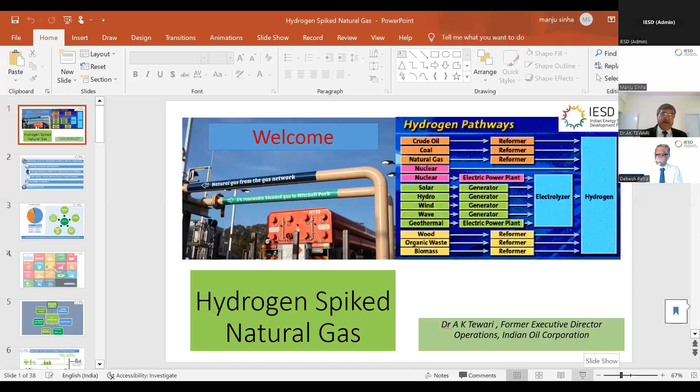Respected ladies and gentlemen, I welcome you all to the present topic of hydrogen spiked natural gas. Dr. Patra has already deliberated about the importance of hydrogen and why we are going for hydrogen at all. Kindly bring it to the presentation mode.

So first, we talk of hydrogen because in the country, the formal announcement about hydrogen was made last year during the Independence Day of 2021. The PM announced it, but the work actually started much earlier than that. Hydrogen is not a new thing in the industry; its invention was done more than 200 years ago.

As far as the oil and gas industry is concerned, hydrogen has been used for the last few decades, basically in refineries for fuel upgradation, fuel quality, and impurity removal like sulfur dioxide and sulfur removal, as well as fuel upgradation from higher end to lower end. Additionally, you all know that ammonia production is definitely centered around hydrogen. So hydrogen was definitely used in the industry.

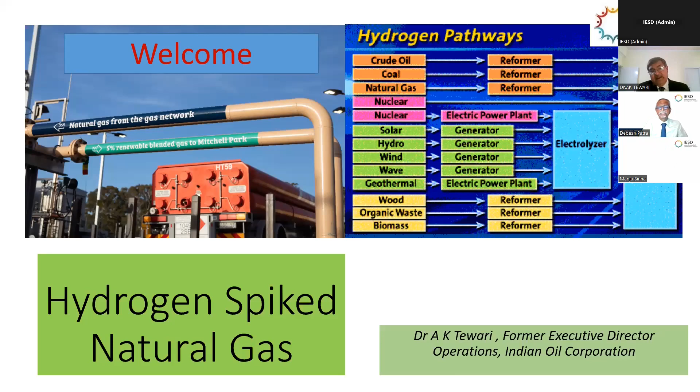Later on, when environmental challenges started coming to the world, a thought process began on how we can decarbonize the sector and use hydrogen, which is available in abundance in the form of water and its derivatives. There are certain processes where we can possibly include and maximize the use of hydrogen. Once you produce any energy or energy carrier, you definitely need to transport it.

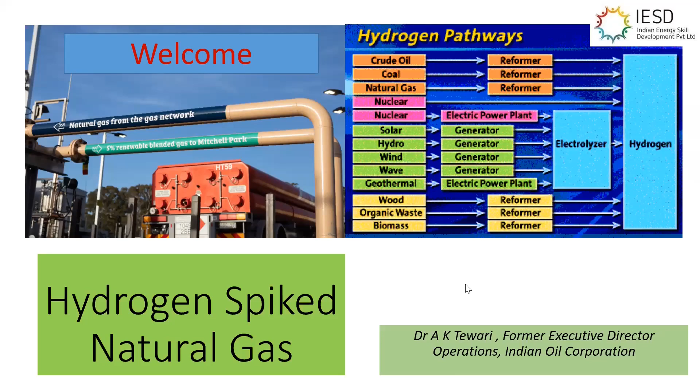Dr. Patra has discussed the conventional mode of transportation. In addition to that, what could be the innovative mode of transportation? Because ultimately, once you produce anything, it has to go to the end consumer through a system. Next slide, please.

In this brief interactive talk, we will be talking primarily about the Indian energy sector—our decarbonization challenges and the role of natural gas in that. Then we'll talk about the hydrogen ecosystem and its perspective in the Indian system as well as worldwide. Then hydrogen blending in natural gas: why we want to go for blending at all, and what are the opportunities and challenges associated with that.

I'll be focusing on the engineering challenges. Then we'll look at pilot projects, study observations, and whether any codes and standards have been developed or are in the developing stage. And then we'll talk about the advantages and limitations.

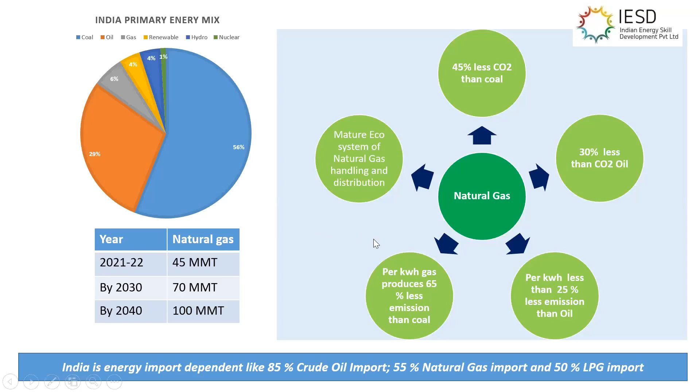The system is mature—some of my senior colleagues like Dr. Patra and other industry veterans are also connected and will recall that we completed the first HBJ, Hazira-Bijaipur-Jagdishpur natural gas pipeline somewhere in 1988. So nearly 35 years have passed, and the system has become fairly mature in natural gas handling and distribution in the country. Next slide, please.

India is aiming at decarbonization. Coming straight to the topic, we have taken up decarbonization as an attempt because it also helps with import substitution, provided you are able to produce domestically.

One initiative is Satat, under which we are creating biofuel as a sustainable alternative for development of alternate transport fuel. Another is high focus on renewable energy, because we want to produce hydrogen using renewable energy as green hydrogen.

On energy efficiency, our existing system efficiency is poor and we have to eliminate losses and increase efficiency. For a diesel engine conventionally, we get about 40% thermal efficiency. If we can improve that, utilization per unit of fuel will definitely be higher.

Similarly, I talked about the increasing share of gas. We plan to go from 6% to 15%.

On electrification, we are going for EVs and charging stations, and the country has seen expansion in that area. This started about 1.5 years back with the first electric charging station among retail outlets of petroleum products.

Today the country has close to 5,000 charging stations in retail outlets, which definitely indicates the pace of that growth.

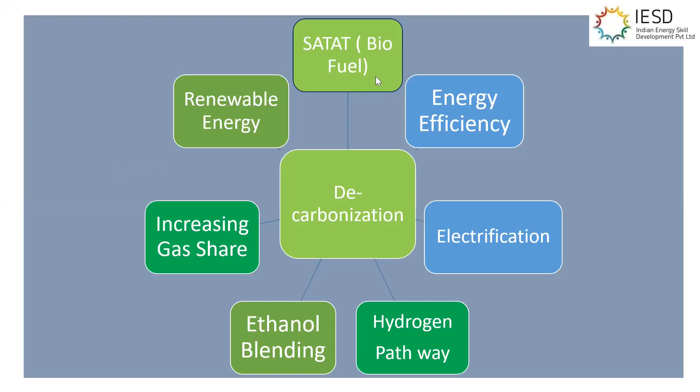Now coming to the hydrogen supply chain. Traditionally, hydrogen has been generated for production of ammonia, cleaning, or upgrading fuel using either natural gas or naphtha.

Normally, if you are not capturing the carbon dioxide associated with that, it's gray hydrogen, and this was within the use of industry.

Dr. Patra has very well described that if you have to consume the energy generated locally, you possibly don't require a much larger transmission system. So refineries were producing hydrogen and consuming it within their hydrodesulfurization systems and other processes, so there wasn't much transportation involved.

Similarly, in the case of ammonia, the fertilizer industry was locally developing hydrogen for production, and now the country has already started gearing up for the use of hydrogen.

Throughout the distribution system of the natural gas pipeline network, be it the transmission pipeline system, sub-transmission pipeline system, or distribution system.

Natural gas is transported from the location where we are producing it; we produce about 45% of it domestically. From that location, we carry out certain cleaning and modification, and then transport it to the pipeline system, or we import from LNG terminals and transport it.

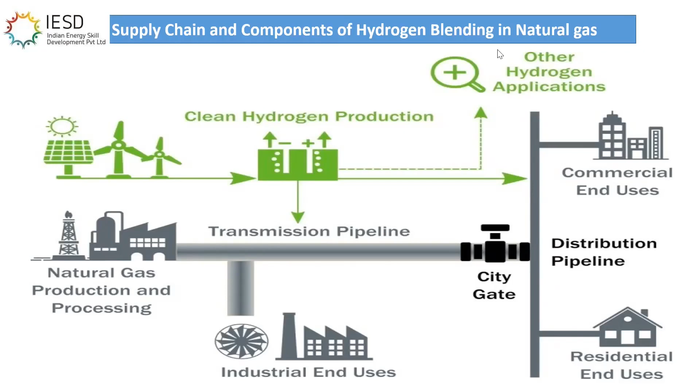The aspects covered include production of green hydrogen, meaning hydrogen produced using wind, solar, or maybe hydropower, with more focus on wind and solar, or biomass and bio waste. These also contribute, but the quantum is definitely less.

Gray and blue hydrogen are produced using natural gas, oil such as naphtha, and also coal, through coal gasification systems, which are also taking place in the country in parallel.

The process of green hydrogen requires electrolysis, that is, splitting water into hydrogen and oxygen. The oxygen can be utilized for medical purposes, stored separately, or sent to the atmosphere.

For gray and blue hydrogen, a very common route is the steam reforming route, where the reaction of methane with steam at high temperature is carried out and a syngas is formed, and that syngas is later converted for the production of hydrogen.

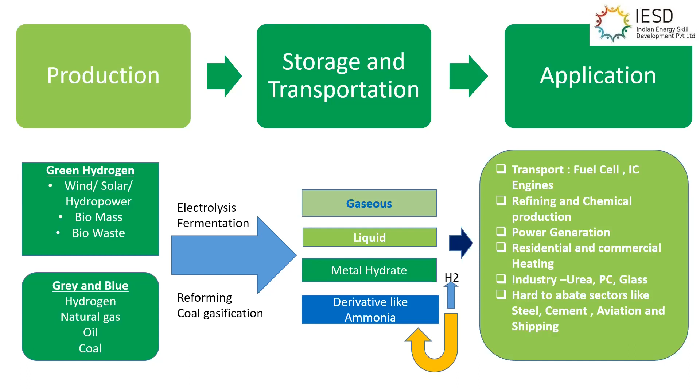And of course, urea production, petrochemical production, glass production. Countries the world over are targeting hard-to-abate sectors like steel, cement, aviation, and shipping, which produce a lot of carbon dioxide emission, to see whether this can be progressively and systematically converted to hydrogen. Because among the entire fuel cycle, all products when burning or combustion takes place produce carbon dioxide - it is only hydrogen which produces water vapor.

Coming to the transportation side, you can have pressurized road tankers in liquid form or gas form to transport them. Definitely the pressure is very high compared to the normal pressure of transporting nitrogen, and hydrogen in pressurized cylinders. You can have a liquid form also for transportation.

Recently, about a year back, a transportation from Australia to Japan has taken place - a tanker of liquid hydrogen. So it's not uncommon; progressively it will become more common.

Storage can be above ground and underground. For large scale storage, some of the thinking is going on cavern storage too - there is salt and rock cavern in addition to aquifers.

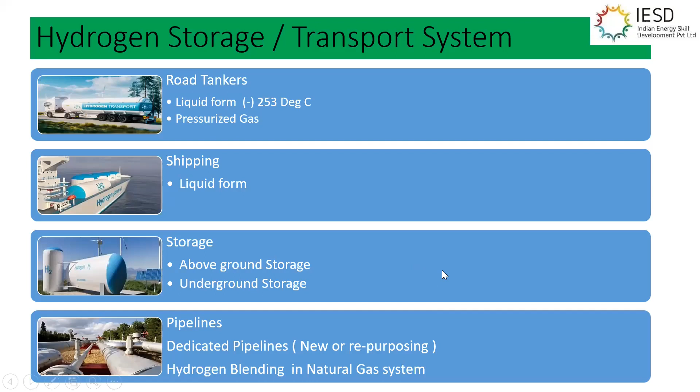Pipelines - dedicated pipelines can be there, as Dr. Patra was telling, or hydrogen blending in the natural gas pipeline. Dedicated pipelines require you to create an entire infrastructure of your own - it will be time consuming, investment will be high. And if you are blending partly, you get a state where you already have a big built infrastructure - that is the advantage to you.

Natural gas consists of methane, ethane, propane, and many other things, but the maximum 90% plus component is methane, which is colorless, odorless, non-corrosive, and tasteless. H2S, nitrogen, and other impurities are present in much lesser amounts. If you talk of LNG gas, practically you are having zero sulfur component. For domestic produced gas, we try to remove sulfur and mercury beforehand, so it becomes, emission wise, less of a problem compared to other liquid fuels.

Hydrogen, as you already know, is colorless, non-toxic, lighter than natural gas, and much lighter than air. Its flammability range is much higher, 5 to 75% or so. Common blends become highly flammable, which we have to handle, especially compared to natural gas. Laminar combustion velocity is high, ignition energy is low, and it may produce higher combustion temperature.

So these are the components that, engineering wise, we are supposed to be handling. That's why the percentage is limited depending on where we are going to use it and what the end application is going to be. Next slide, ma'am.

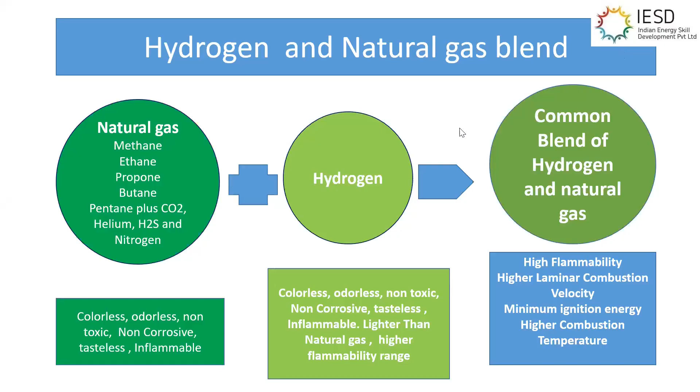Engineering challenges: hydrogen blending density is lower than methane, so for any leakage from the same leak size, the volume flow will be high because it is lighter. Viscosity reduces with hydrogen blending non-linearly as the hydrogen concentration increases. So we are talking of 5 to 15 or 20%, which is manageable within that range.

Molecular mass reduction affects side branch flow and buoyancy forces, because hydrogen is lighter. Once injected, there is a chance of stratification in the pipeline, with a tendency to get trapped at the upper layer. That's why it is normally injected from the lower side at a certain angle, so that, as per the dispersion model, stratification is avoided.

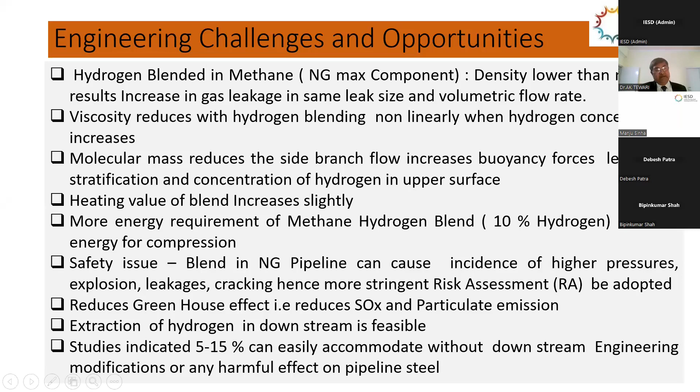Heating value of the blend increases, requiring more energy for compression. In CNG applications, you go for a vehicle filling pressure of around 250 bar. So definitely a little more energy is required, because compressing a lighter gas requires more energy.

There are certain safety issues because of higher temperature, higher explosion risk, and the lighter nature of hydrogen, so risk assessment has to be geared up accordingly. India already has a safety structure well lined up as per regulatory requirements, ERDMPs, and other such things, so we can address whatever changes are required for the proper introduction of hydrogen.

Regarding the greenhouse effect, it reduces SOx level and particulate matter, and definitely increases NOx level, but only beyond a certain level, not up to 30-40%. Below that, the NOx level has no significant effect.

Extraction of hydrogen downstream, if you want to separate it, since gravity and density are different, you can use a membrane system to separate it. If you want it for end use, for a specific application like a hydrogen turbine, possibly you can separate it too. Industry studies have indicated that 5 to 15% can easily be accommodated.

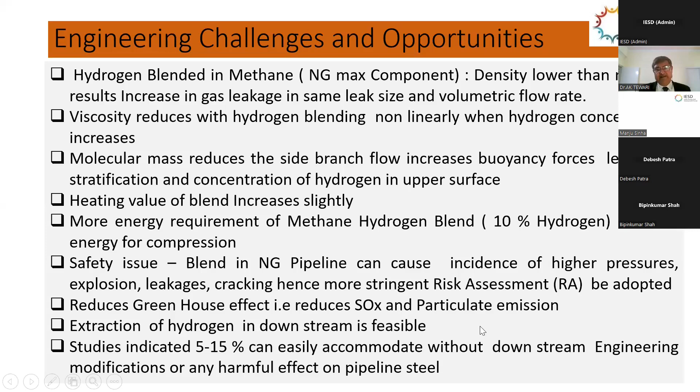Next slide, ma'am. For the steel pipeline, I'll touch on other aspects too. The most prominent problem we see is pipe material degradation, that is embrittlement affecting the high tensile steels. It reduces ductility and affects mechanical properties. I'll discuss this a bit more in the next slides.

Switching engine burners from methane to a hydrogen-methane mix may require minor modifications to the burner. Definitely in SI engines, as such, no modification is required, because a lot of testing has already been completed, both by Indian Oil and elsewhere in the world, and it is okay.

It's suitable for large gas turbines because the higher temperature and larger enthalpy drop will produce higher output. In the process, burning hydrogen also gives higher temperature for steam, and you get higher burner efficiency up to 25%. Beyond 25%, some flashback and other issues take place, so that is not done right now.

Embrittlement leads to crack formation in the pipeline, which is a major challenge for any pipeline operator. A simulation study based on cyclic loading was carried out in the lab for a pipeline of X42 grade, because higher grade pipelines are more susceptible to cracking. It was done assuming less than 40% crack already existed in the pipeline, to see what the hydrogen environment effect would be. The simulation and fatigue testing analysis indicated that even after 100 years, the crack will not propagate beyond 75% of depth, starting from 40%.

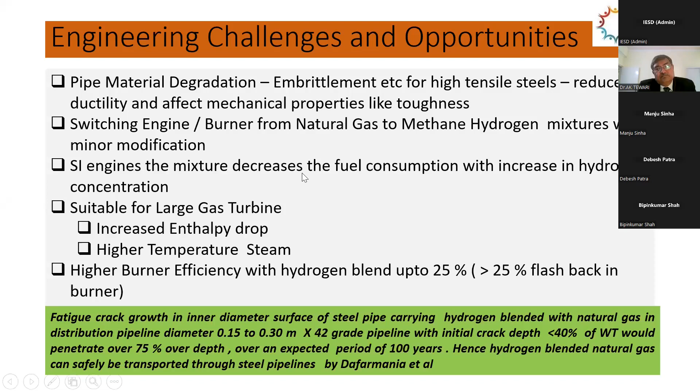The quench distance of hydrogen is smaller, so heat loss to the chamber wall would be slightly increased by adding hydrogen into the natural gas. Energy density is almost 9 times lower, so blending reduces the effective energy per unit volume, which possibly requires higher compression too.

One advantage, in case of a subsea pipeline—we are talking of the natural gas city distribution pipeline, but for subsea pipelines—natural gas hydrogen blending can avoid hydrate formation. Hydrate formation in any natural gas pipeline is a major risk, so this reduces that risk.

The laminar burning speed of hydrogen is nearly 8 times higher than that of natural gas. So addition of hydrogen can increase the burning velocity, bringing advantages of shorter combustion duration and constant volume combustion duration, giving improved thermal efficiency of the engine.

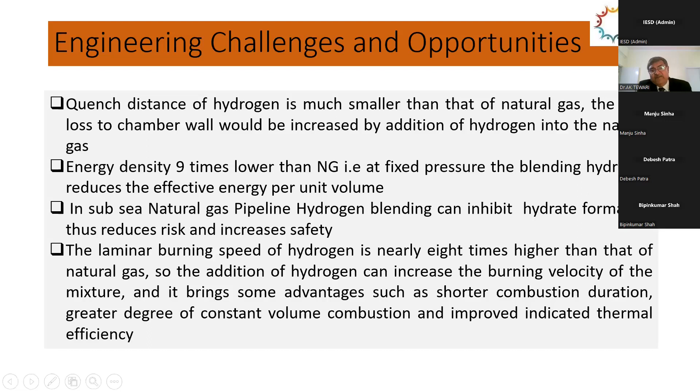So accordingly, the controls are exercised in the pipeline.

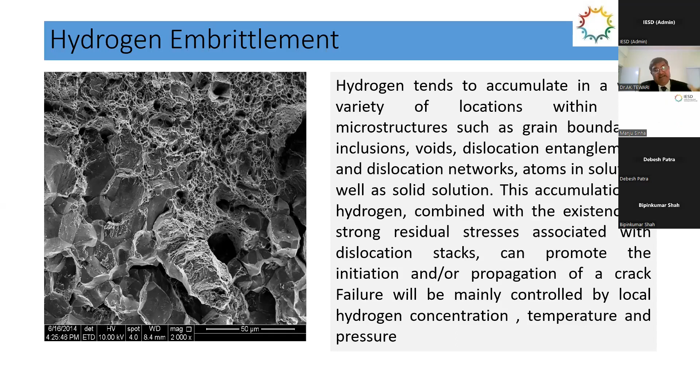Next slide, ma'am. So to conclude on the embrittlement aspect: strength of material and residual stress matter, because forming or welding creates certain stresses in the metal. It depends on the strength of material, such as yield stress or ultimate tensile strength, but also on the residual stress in the system, pressure, temperature and exposure time, strain rate, surface condition of the metal—whether smooth or irregular—and the concentration or amount of hydrogen exposure.

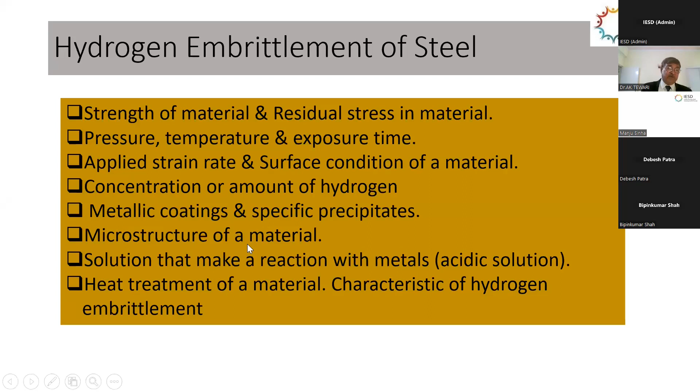Certain metal coatings prohibit hydrogen from entering the metal, and the microstructure of the material—whether ferrite, bainite or another structure—affects how hydrogen penetration increases or decreases. Certain solutions react with the metals, like acidic solutions, which I prefer to avoid. Heat treatment of material matters too; the characteristic of nitrogen, particularly nitriding, improves the embrittlement properties—there won't be more embrittlement if you use nitriding as a heat treatment process.

So we summarize the problems here: material toughness, ductility, elastomer effect—because we are distributing through a pipeline system that has PE pipe too—leakage, permeation, effect on the pipes and meters, and of course end-use burners and other effects to consider.

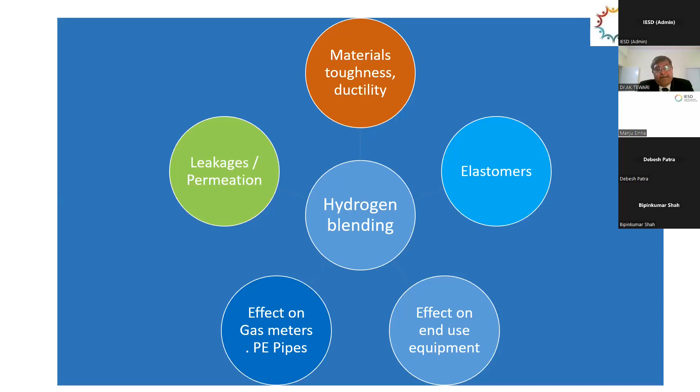One of these studies, of course many other studies will be presenting also, but that's one major study - the Gas Technology Institute of the USA. They have carried out the life cycle assessment of hydrogen blending, and the industry is normally guided by their observation. They said that safety is acceptable up to 15% blend.

Leakage assessment is likely to increase. So definitely you should be prepared for a better leakage management system, better sensors to find out the leakage if it is happening. The pipeline industry and others are already aware of this.

They also indicated one very vital point, that lower grade API pipe used for steel pipe in the industry for transportation - up to X42, X46, and even X52 - is suitable. Sometimes we have X70, we have gone for that, but higher grades like X80, X100, even X70 to the extent possible should be avoided.

They concluded up to 50% blend in this lower grade - lower grade meaning low tensile strength steel. The 50% even may not cause much failure, and there will be no appreciable, almost no effect on the PE line also and the gas metering. That the Premier Institute gives such findings gives a little confidence among the engineering fraternity.

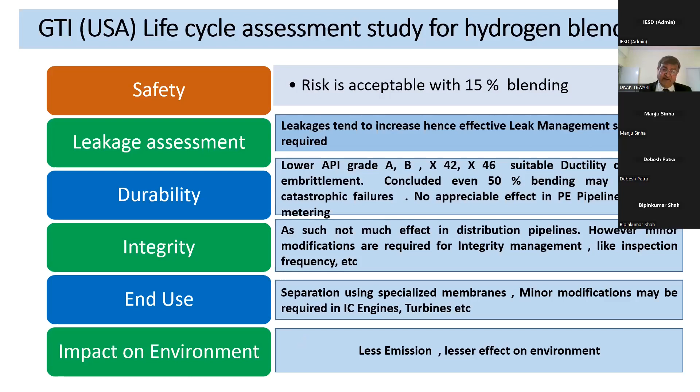Regarding the PE pipe, because of low pressure distribution, we go for a combination of steel pipe as well as polyethylene pipe. The study also indicated that as such there is no effect - they have taken a study for 1,000 hours or so for various pressures, by various institutes, and as such no problem was found. They indicated that safe and efficient distribution of natural gas can be done along with the hydrogen mix, with the PE pipeline system too, which is operating at lower pressure.

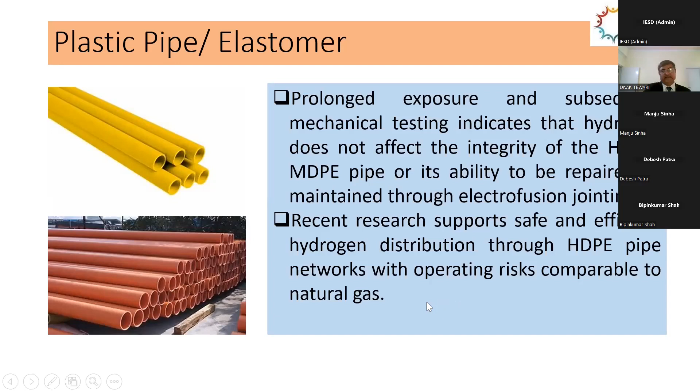For example, in your houses, it is coming in millibars - some millibars only you are getting. And for a distribution industry or something like that, they are getting around 4 to 5 bar, whatever is required. And particularly for CNG, you are getting it at low pressure, then you have a compressor which compresses it to 250 or 300 bar and puts it into the vehicle. So normally the distribution system is at lower pressure, where these pipelines are also suitable in addition to the steel pipeline.

Research findings on hydrogen blending in natural gas were carried out almost world over. The US indicates that 5 to 15% volume is possible, and has given clearance for their grid. Canadian research is a little more conservative - their research council laboratory undertook tests and indicates 1 to 5%. The Australian report clearly says up to 10%, no problem, and significant impact on quality, material risk, and other things they have tested - not much.

The Netherlands project says blending up to 10%, and they are further carrying out research on that. Denmark concluded 15%, and the UK concluded up to 20% hydrogen blend - absolutely no issue on that, you can go with that.

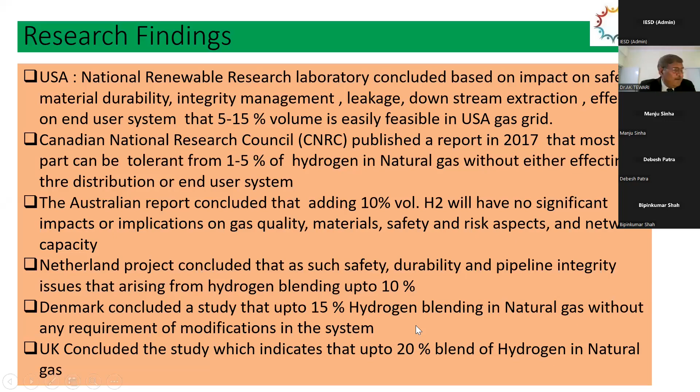Advantage, we reduce the import bill. First of all, we discussed existing capacity utilization of gas infrastructure. Most gas pipelines are designed for future use, so on day one they're not supposed to be saturating the capacity. So most gas pipelines have some cushion for future use, and that can possibly be utilized and filled using hydrogen. Even some trunk pipelines have 50% cushion that can be utilized. And the city gas distribution network is coming up too, with wide infrastructure covering 96% of the geographical area and 86% of the population. So that much volume is available for distribution setup.

Reduced emission, we talked about. India has a potential of becoming the hub for green energy. Just as after COVID we are trying to become the manufacturing hub, manufacturing aircraft and defense equipment, similarly India wants to become the green energy hub so that instead of an import dependent economy, we should be exporting green hydrogen to other places. We'll be able to meet the climate target, our SDG goal, particularly the clean energy target and climatic conditions. This is the way forward.

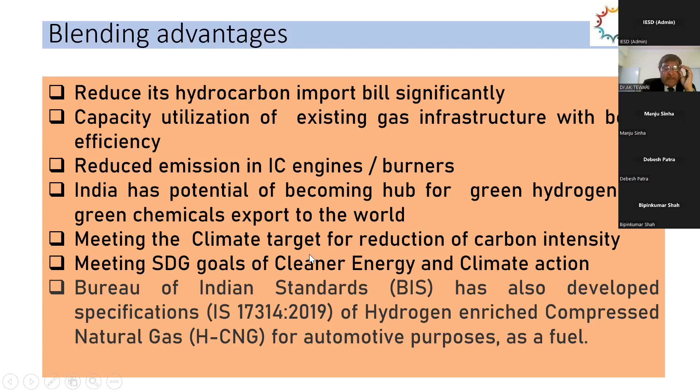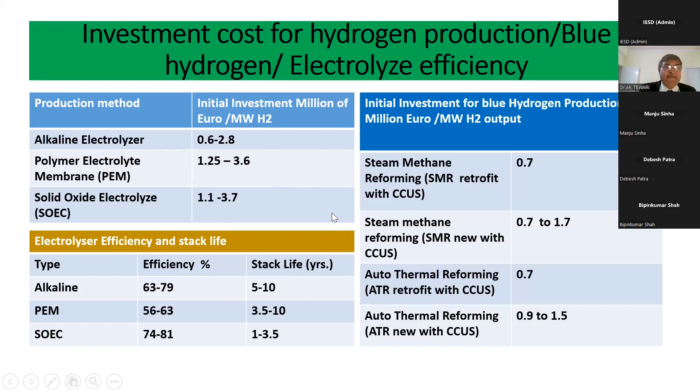India's budget has given many initiatives for green energy. Solar power allocation has gone up. Refineries have allocation for net zero emission, 35,000 crore for energy transition. Battery storage VGF for battery storage, 13 gigawatt of renewable energy from Ladakh, a remote place. And the green hydrogen mission has also been allotted close to 20,000 crore. India has been given a production target of 5 MMT of hydrogen production by 2030.

World over, as of today, we are producing 94 MMT of green hydrogen. We expect by 2030 we'll be producing 115 MMT of green hydrogen world over, out of which India itself is targeting the 5 MMT target. Allocation has also increased for refineries to go for cleaner fuel. Terminology like green fuel, green energy, green farming, green mobility, green building, and green equipment has been made for policy support of the government. And for the first time, since no petroleum product comes under GST, biogas and CBG have been brought under GST in this budget.

Coming to the Indian scenario, GAIL has already started blending in Avantika Gas Indore with 2%, and it was successful. An 18% blend was used by Indian Oil Corporation, DTC, and Delhi Pollution Board together, who carried out a trial with 50 buses running, and results are very encouraging. NTPC has started with the help of Gujarat Gas in Surat township for blending.

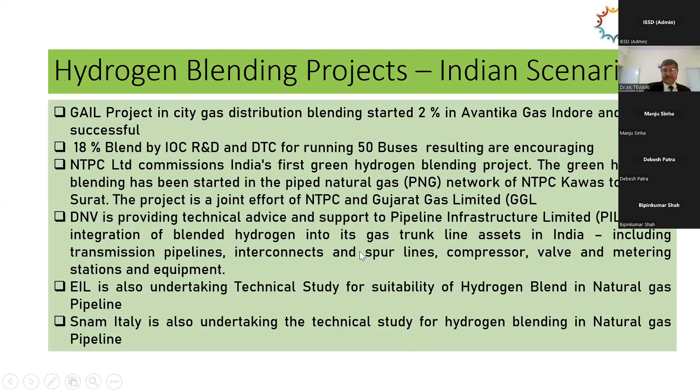DNV is taking a technical study for PIL, Pipeline Infrastructure Limited, which has a major share of the Reliance pipeline. They have already undertaken the study for the trunk pipeline, interconnecting line, and spur line, to see whether they can put hydrogen in it. EIL, being a main consultant, is undertaking a technical study for suitability for the entire industry in the petroleum sector. Snam Italy has recently been hired by Indian Oil Corporation for a technical study. So these studies and other things are already happening in India.

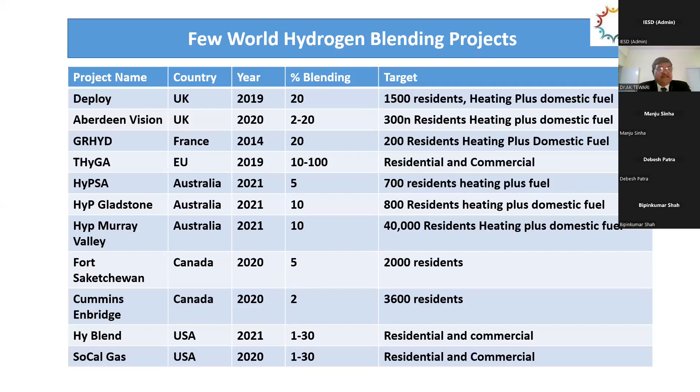As I talked about the Indian scenario, hydrogen blending has already taken place and we are comfortable in that. NTPC blending also, the initial preliminary results are giving a good indication, and technical studies are going on with IOC, GAIL, PIL. Even Oil India has called for a technical study in that. Apart from the private sector, they are also undertaking their own study in their domain for the blending of hydrogen in the natural gas system.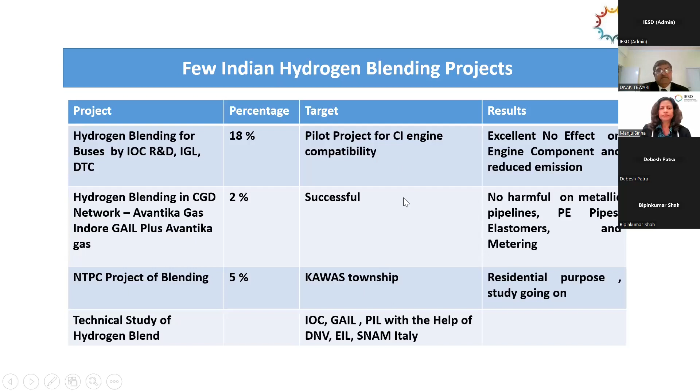Key challenges we discussed: increased combustion temperature, technical challenges, flame speed of the gas blend may require design modification in IC engines. Practically, in IC engines, up to a certain blend we have tested, it's not required. For burners, some modification will be required if you are going to 20-25%.

Lower mass flow and energy transport requires additional compression, we talked about that. Increased risk of leakage - definitely the sensors and other things, our hydrocarbon detection sensor or gas detection sensor, have to be converted into a hydrogen detection system so that we are able to identify the leakage and attack on that.

The hydrogen penetration into the lattice increases the brittleness of the pipeline. We call this the toughness of the steel. The toughness, in fact, tends to reduce. Toughness is the property which prevents crack propagation in the steel, so if that property is affected, the crack becomes faster.

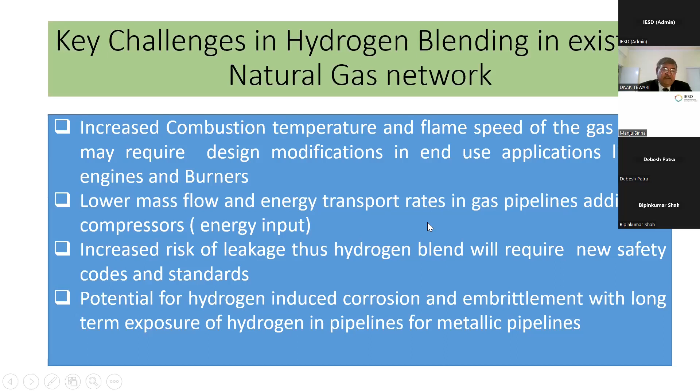Pathway India - as we discussed, 5 million pathway, over 8 lakh crore in total investment, creation of huge jobs, abatement. India is the third largest carbon dioxide emitter in the world after US and China. We emit about 2.6 gigaton per annum, a huge number.

A small sum of 50 million metric ton of annual greenhouse gas emission reduction is targeted. Large scale investment for renewable energy - as of today, the country has nearly 130 gigawatt of renewable energy, and wants to go for 500 gigawatt by 2030. Incentive has been given for green production and purchase obligation, because the electrolyzer cost is expected to come down by 70% by the end of 2030.

That is, the competition is taking place. India has also started manufacturing - the manufacturing base is set up - and the net zero commitment of carbon dioxide emission, the country is going for that, and we have to be geared for it.

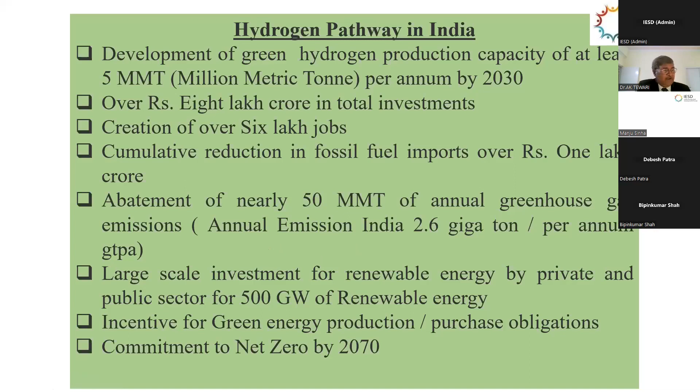So hydrogen mission pathways are very clear: demand creation, because purchase obligation and other things will come, utilization and export of green hydrogen. If we are able to produce sufficient quantity, we'll prefer to export, like medicine export, aircraft export, and defense equipment export we are targeting. Even under strategic intervention, encouraging domestic manufacturers of electrolyzer - already some companies have moved in, others are at the threshold.

Incentivizing the production of green hydrogen by production linked incentive. Support pilot projects in emerging end-use sectors and production. Identification of large scale hubs and utilization of regions for green hydrogen hubs, like we have textile hubs, petrochemical hubs or something like that - so we are targeting hydrogen hubs in the country.

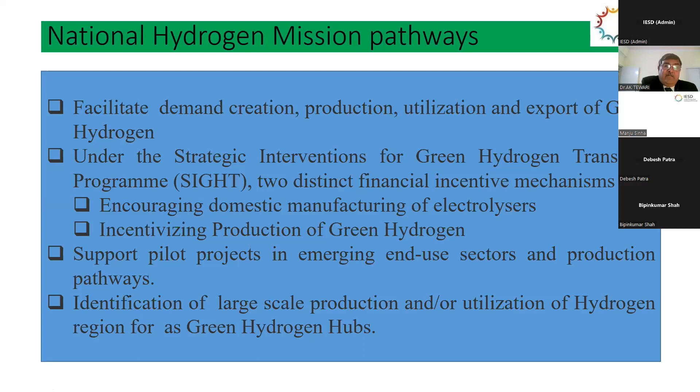Government of India has also announced that the motor vehicle act amendment has taken place for hydrogen-CNG mixing, blending, and codification has been done. It was worked out that emission reduction of CO is down by 70%, with 5% fuel saving. This is the first step, and definitely some auto manufacturers like Maruti and Toyota have started working on HCNG engines, looking at long-term effects and what modification they can carry out. This is all positive, and possibly we'll be getting a ready engine for HCNG in the market.

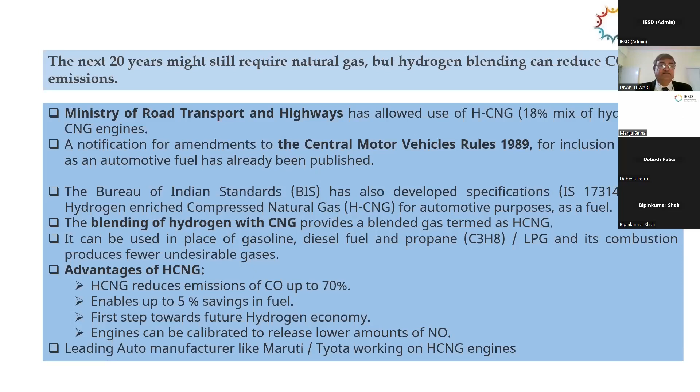We conclude that hydrogen blends up to 15-20% are suitable for transportation through the existing natural gas distribution network. No major modification is required for CI and SI engines, that's compression ignition diesel engines and spark ignition petrol engines, nor for burners and heaters. There's blend compatibility with PE pipes, valves and elastomers, since the metering system has many seals made of elastomers. Fuel saving up to 5% with improved efficiency. It supports decarbonization initiatives, import substitution, Atmanirbhar Bharat, greening natural gas, and a step towards India becoming a potential hub for hydrogen export.

Regarding codes, the BIS code has already been developed for gas transportation in the country. OISD 226 is under revision, and a body has already been formed; in a couple of months they will possibly publish the revised code for the hydrogen-CNG mixture. Additionally, technical studies undertaken by EIL and other public sector undertakings will provide input, and the code will be separately developed. ASME B31.12, 2019 version, for hydrogen piping already talks about hydrogen compatibility, so detailed hydrogen pipe codes already exist.

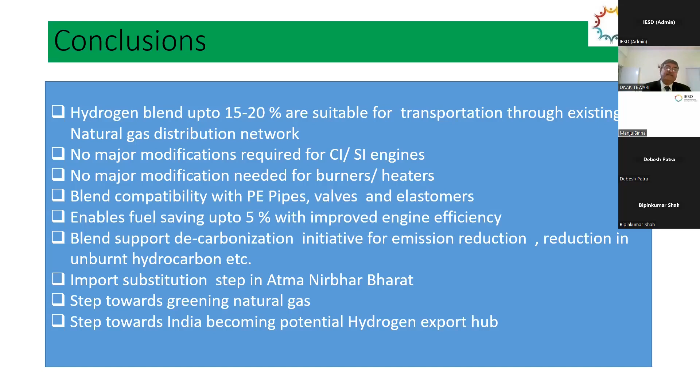So we have a pathway for hydrogen. At the current level, we are using it for refinery processes, methanol production, ammonia production, hydrogen fuel cars, and biofuel upgradation, reducing viscosity of biofuel and other properties.

In the next 3 to 7 years, we are targeting the steel sector, a mega sector and a major coal guzzler, as well as cement industry, glass industry, downstream chemical industry, electronics sector, heavy transport vehicles, public transport, and hydrogen trains. Even the railway has ordered the concept of a hydrogen train, and maybe a couple of years later we will see the hydrogen train really running. In some countries it is already operational, not at large scale, but at pilot level.

For small vessels and ferries, we expect that within 5 to 7 years we'll be able to do that, either directly as hydrogen or via the ammonia route, as well as building heating and cooking, which is definitely part of the distribution setup. Other difficult sectors matter too, because cost is an important factor. The power sector will be touched by 2030 and beyond. Large shipping, which contributes about 3% of total emissions, and not only carbon dioxide but also SOx and NOx, has been left for later.

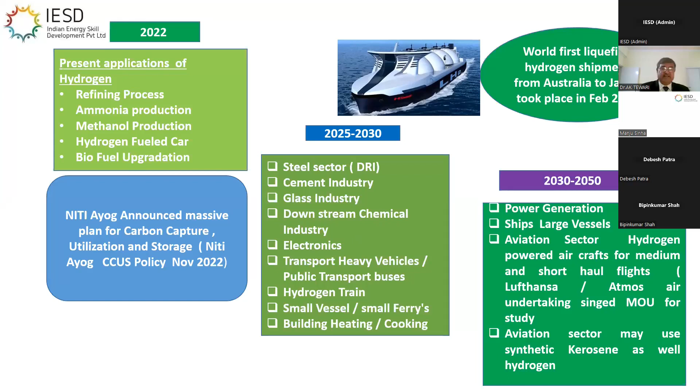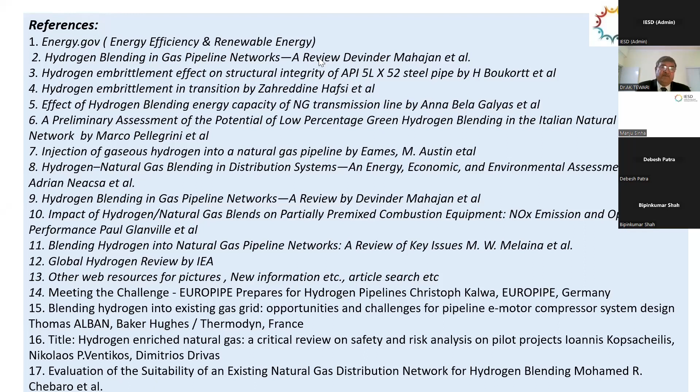This is the last slide now. Thank you very much for your attention. I'm ready for questions.

Yes, sir, there are many questions and we will take them one by one. Basically, a lot of questions you have already answered with your presentation. So I'll just ask the first one: please elaborate on in which format hydrogen transportation is economical—by metal hydride absorption, mixing with natural gas, blending, ammonia transportation, and then conversion of ammonia into methane. That is a question from Viresh Tadole.

The most cost-effective route is transportation through the existing pipeline, because you are not converting the gas form, you remain in the gaseous form itself for transport. No additional conversions take place in the front end, so natural gas distribution is the cheapest option. Of course, other options like liquefaction, compressed cylinders, ammonia, or hydrides are costly. The cheapest is transportation through blending with natural gas.

Next question is from Rishabh Singh: what is the hazard related to use of hydrogen in terms of leak and emissions? As you know, the industry is already facing leakage issues, and for that we have a leak management system and leak control system.

Hydrogen has a high ignition temperature and is very light. If you consider air density as 1, hydrogen is only 0.07. So it is much lighter and will quickly diffuse into the atmosphere. If allowed to leak, it will dissipate, but the idea is not to allow the leak, so the leak detection system needs to be improved.